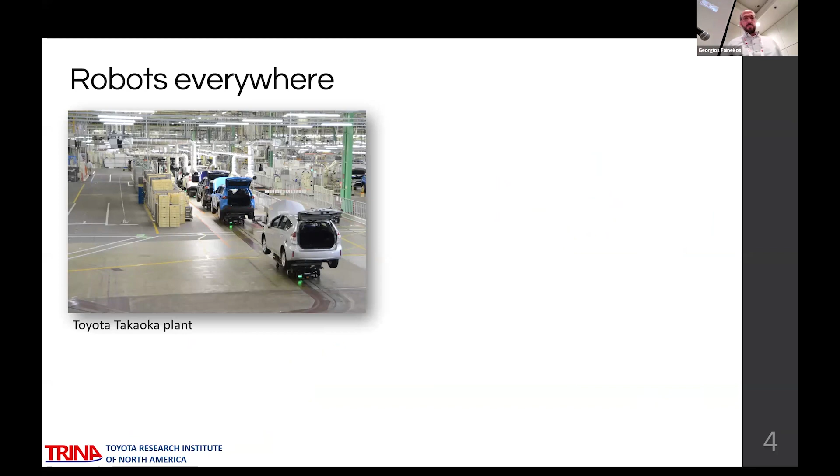Let's move on. Robots are everywhere, and this is a Toyota Takaoka plant. You have robots moving around the vehicles for assembling, robots in logistics warehouses and so on, and more recently, robots in hospitals. All these improve efficiency of the system, help in many cases with labor shortages, and so on.

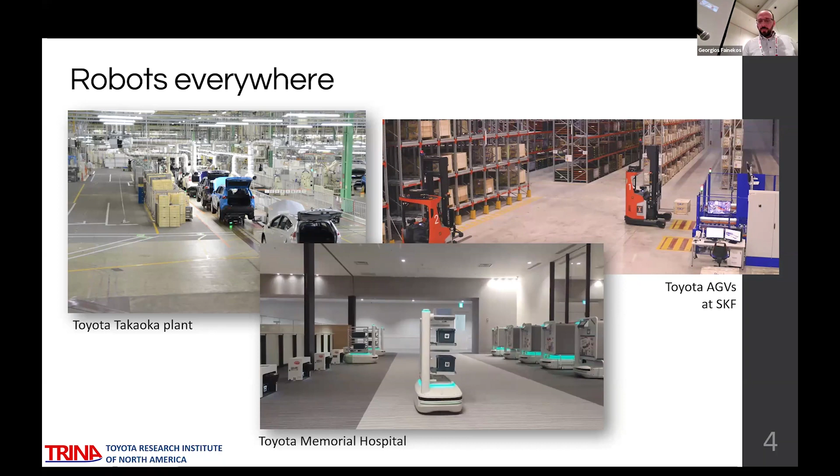I would like to highlight here a recent article by some of our colleagues in Japan, where they published an article exploring the development of a production-level system for hospital robots. It's a good read highlighting how they encountered several challenges in that environment and how they overcame them.

For example, when you have robots in an environment, they might block a corridor, since it's a confined environment—you don't have corridors for the robots separate from what the humans are using. Everybody's working together, so you will run into such scenarios. Another example is you may want event detection and scene understanding, to see what's happening in that environment. And finally, a lot of simulation-to-real and back testing and verification.

Again, this is not our team's work—this is primarily our colleagues here who actually develop these products. But we are inspired by these challenges, and we are doing our own research, trying to push the frontier.

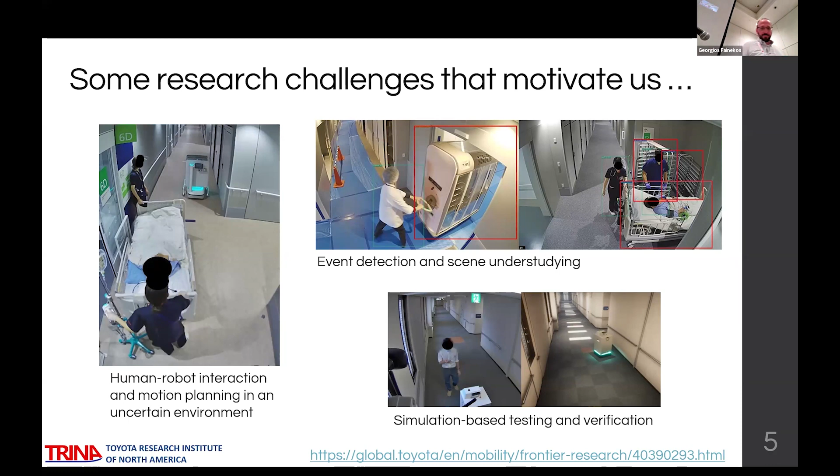Within that context, we work in all these layers of autonomy, from the global planner all the way down to the low-level control. That's what I'm going to briefly discuss today, taking you on a brief journey from global planners all the way to low-level control, where I'm going to advertise our latest toolbox that's publicly available for control barrier functions.

All right, so I'll start. Since we are just four people in that group, we are working a lot with collaborators. So at the conclusions, I'm going to circle back and say we are always open to collaborations—please reach out with ideas.

The first topic I'm going to present is actually the work of Kandai, who is here in the room. He did an internship with us, I believe two years ago, and we were looking back then at how to learn workflows so that we can observe existing processes and extract information, build models, and then optimize for cobots or any type of optimization we might like to do.

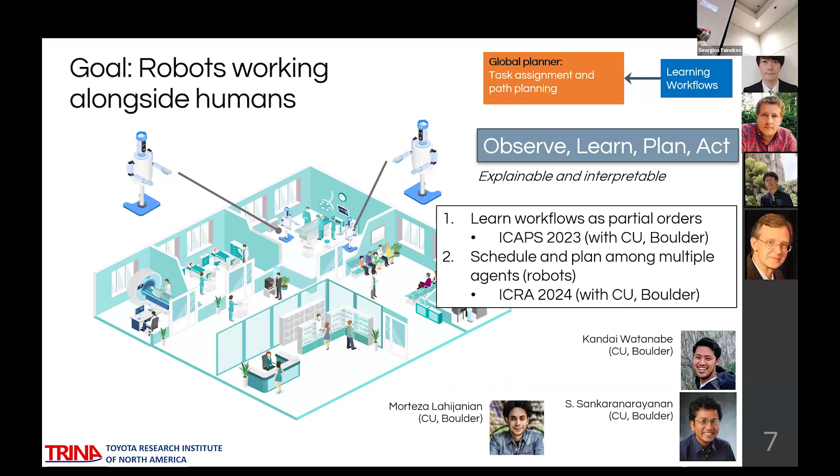There was also a follow-up work. When Kandai went back to his university, we continued working, and he's going to give a presentation on Thursday, so please follow up on that.

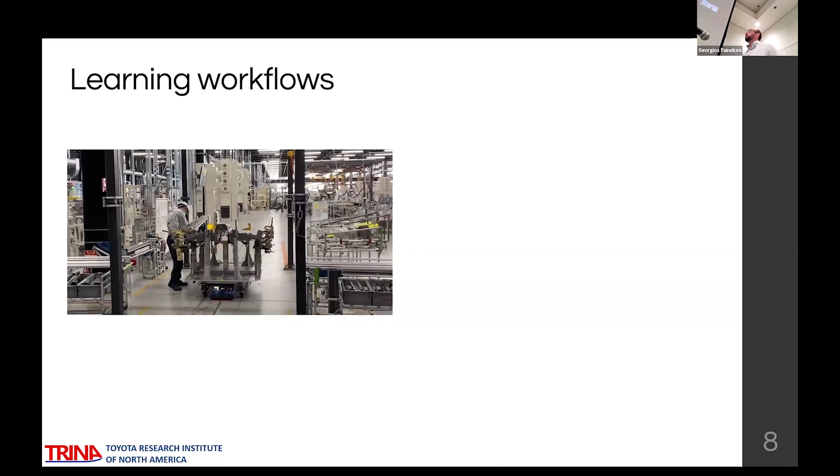Let me give you the basic idea here. Let's say you have a factory floor, workers are doing stuff, and you have a method to extract events occurring in that environment. This will typically look like time traces, meaning you have an observed event and a time that event happened, and you have multiple of these. What you'd like to do is collect all this data and learn a timed model that represents the constraints for that process.

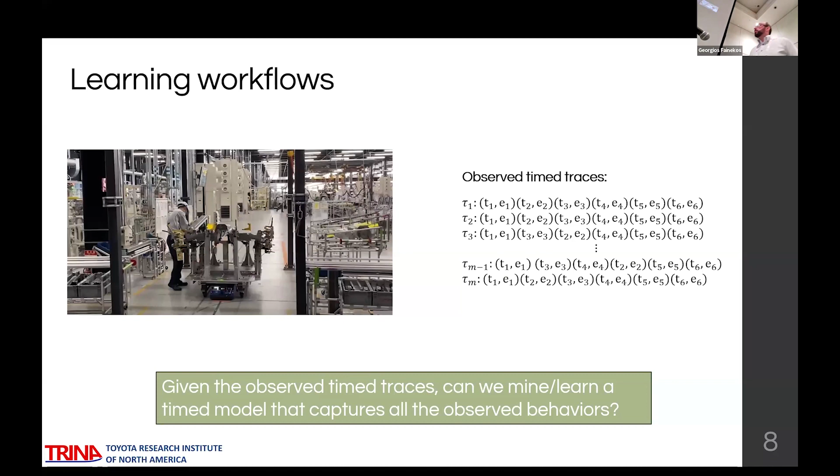So you have events coming in, and you would like to construct such a partial order abstraction of the events coming in. And in addition, you're going to add timing constraints because these events are happening within certain times that you observe. You collect all this information, and you are going to add clocks that measure time relative to certain events.

Your goal here is to collect all these constraints and then build a model that represents this with a minimal number of clocks. Minimal number of clocks is an important constraint here because this is what you need to track at real time to make sure that you're satisfying that partial order graph or not.

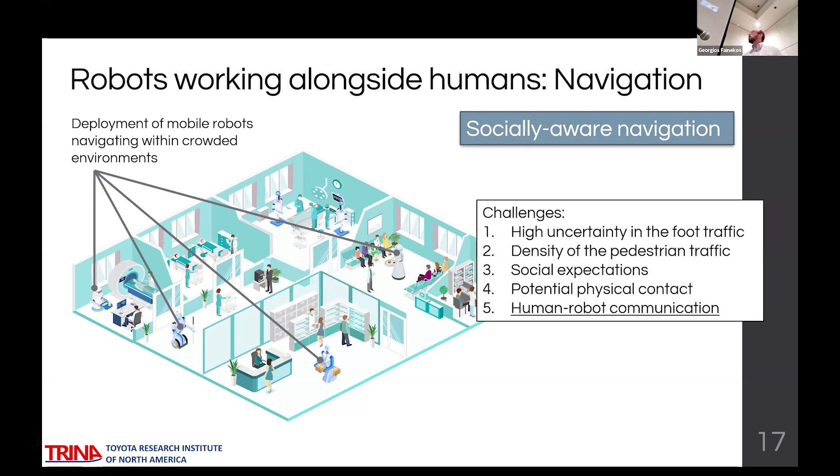I would like to summarize them here. We have high uncertainty in the foot traffic, how many people are in that environment, density of pedestrian traffic. Social expectations, potential physical contact between the robots and the humans, and finally human-robot communication, so that we can start

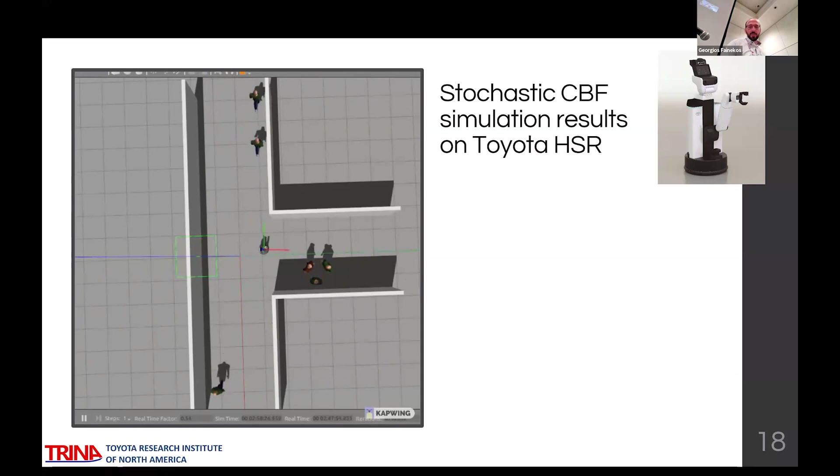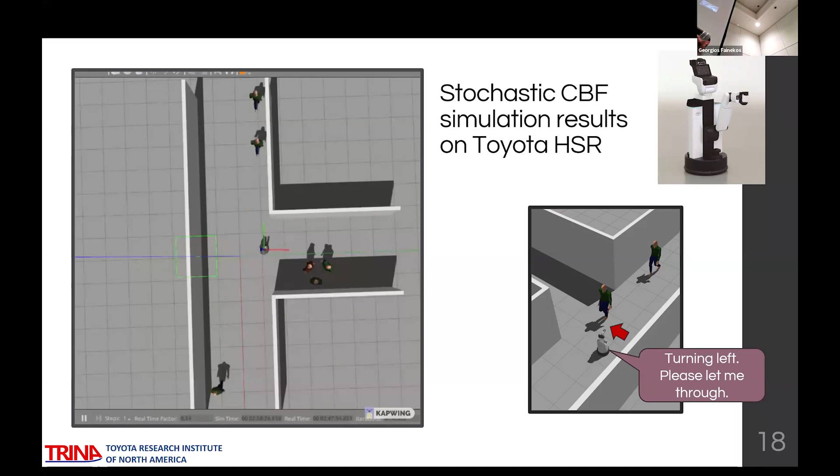So we would like ideally to be able to plan for the robot, to plan the communication actions in the environment. So at some point you would like to say, oh, I would like to make a left turn. It doesn't matter what communication modality you're using here. Are you projecting an arrow on the floor? Are you saying it verbally, are you having flashlights going on, or whatever? The question is, when do you plan to, and how do you decide what communication action you should be issuing?

This is work we have been doing with my former colleague and current collaborator, Sid Srivastava at Arizona State University, and we are continuing working along these lines.

So the idea is the following. We do the classical motion planning paradigm, and on top we have what we call a communication planner. The bottom layer is the standard RRT, for example, but it doesn't really matter, it's any standard motion planning technique. In this particular case, we use prior work we have done on rapidly exploring trees with control barrier functions as constraints to guarantee safety. But again, this is agnostic to that—it's just a method we had available to guarantee safety at a low level.

So we have the human motion model to predict the movement of the human from the perspective of the robot, to build this tree. But on top of that, we have the communication planning layer, where the important part is that we have a human sensor model—what the human may be able to perceive from where the robot is and what communication actions it has. Maybe it has some visual communication actions, maybe some verbal communication actions. It really depends. So what we have to do here is have a belief update on what we think the human may perceive.

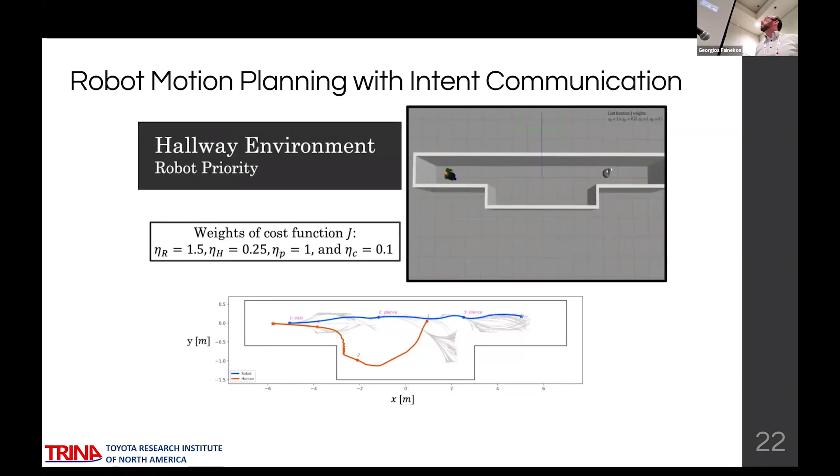The second part you saw there is that the robot did not have priority. Maybe the task it was executing was not time critical, so it stays on the side and lets the human pass by. So it's not surprising that if you communicate, you reduce deadlocks, and this is what you would expect at the very least.

And so you can also, by using a social force model for the human motion, collect numerical data. You can argue whether this is realistic or not, but nevertheless, when the human collaborates, the simulation experiment shows we can do much better in terms of proximity cost—how close you come to the robot—and deadlocks. In close, confined environments, if you don't have the communication layer, you can get into deadlocks. That also connects to the morning talk about communication between robots—if you don't have communication, you can run into deadlocks. The same situation applies with humans and robots.

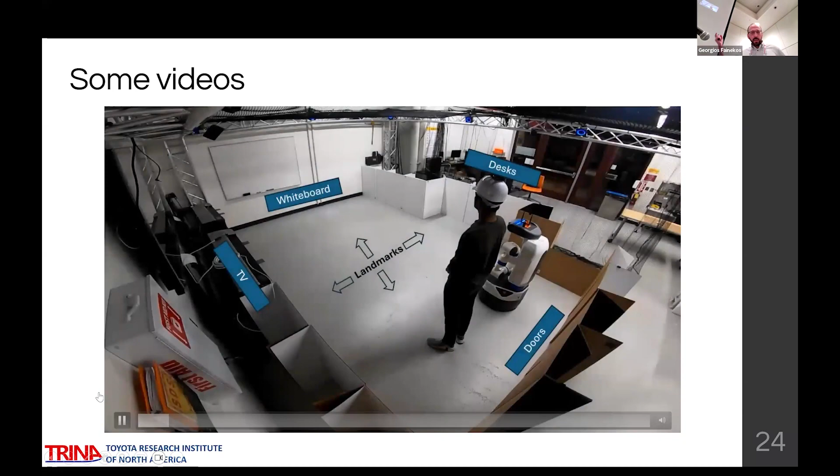We have real experiments trying to move this to more realistic scenarios. This is a scenario that Mehdi, who is the lead author on that work, has done—a small environment, but it works on a real robot. So this is the robot and human working next to each other. There's no interruption here.

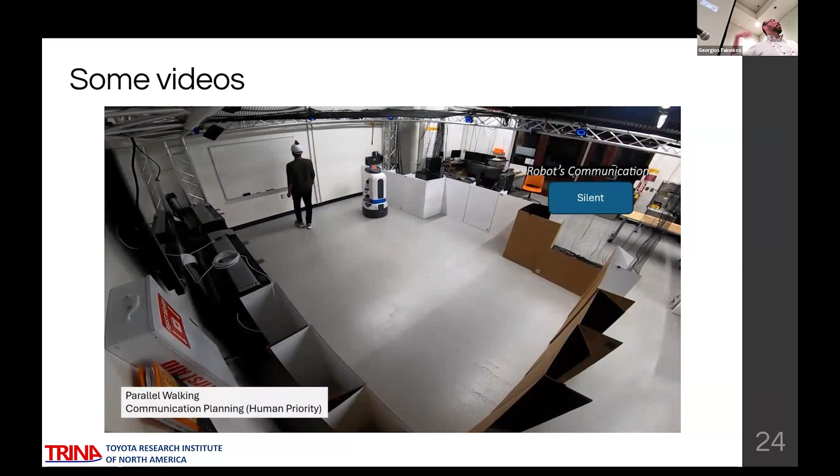I think it's a little bit clunky through Zoom, but you get the idea. You get the same behavior no matter whether the robot has priority or the human has priority.

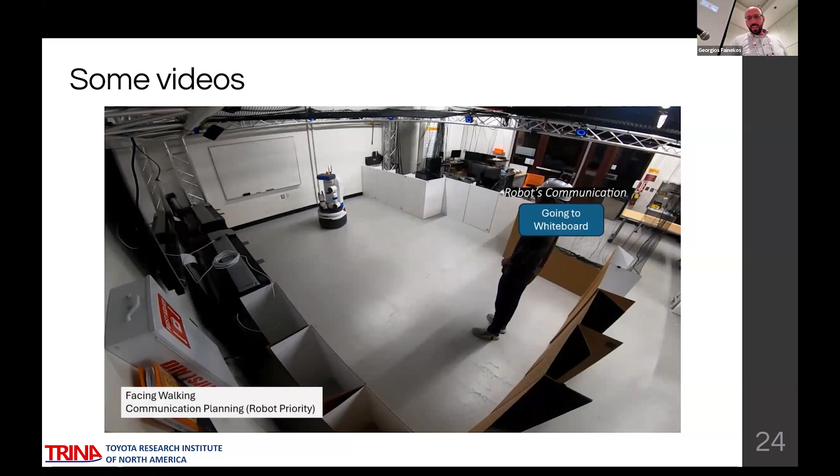Things become a little bit more interesting when you would like, for example, to go to the whiteboard. You tell the human, I'm going to the whiteboard. The human hopefully understands that and moves out of the way. So that's the experiments. I'll skip now the rest, just to give you an idea that there is progression into that.

I'll go now to the low-level control layer, where we do risk-aware motion planning. Again, in human-occupied environments, the uncertainty is higher. There is higher risk, and we need to somehow accommodate for that. There is a lot of work along this direction, maybe too much to try to summarize it.

From our perspective, what we have been doing, we have been developing control barrier functions that take into account probabilities and risk and so on. So let me give you just a brief presentation of the setup here.

We assume that the robot itself is a deterministic agent, has full control of its actions, but the environment is non-deterministic. In particular, all the dynamic obstacles operating in such an environment can be modeled through stochastic differential equations. And you may want to model neighborhoods of humans in case you have social constraints that you would like to take into account, and so on.

Our goal here is to compute control actions, paths, such that the probability of collision within a finite amount of time is bounded, and is bounded by something we choose, this probability upper bound here.

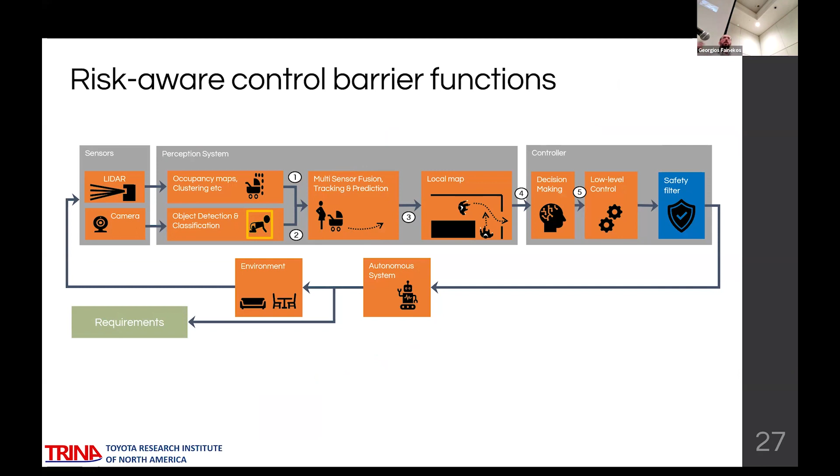optimize with respect to a reference trajectory produced by the pre-existing control system, so that you satisfy your safety constraints and bound the risk to the desired level.

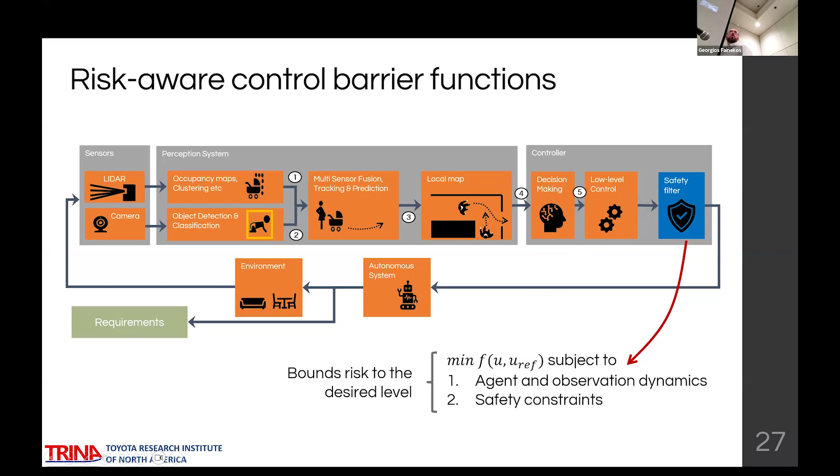Typically, this is how it looks like. You have a quadratic program, you have a bunch of constraints so that you can bound the risk. And depending on the exact method that you're using, you're going to get different mathematical formulation here. And every paper we write has a different controller here, so I'm not going to go into the details.

The reason I'm showing that is that what we are trying to do now, and that's the toolbox that we released, is to make this easy. So we would like to be able to have people code something with a control barrier function, risk or non-risk aware, within minutes, hopefully. So that's the next step I would like to present here.

It is our new toolbox, which we just released on control barrier functions. We utilized functional programming primitives, so everything is encoded within the functions that you are using.

We assume that you're going to give a controller, the system dynamics, any state estimator that you might be using, integrator for the simulation, perturbations if the system problem is stochastic, and any sensor model that you're using.

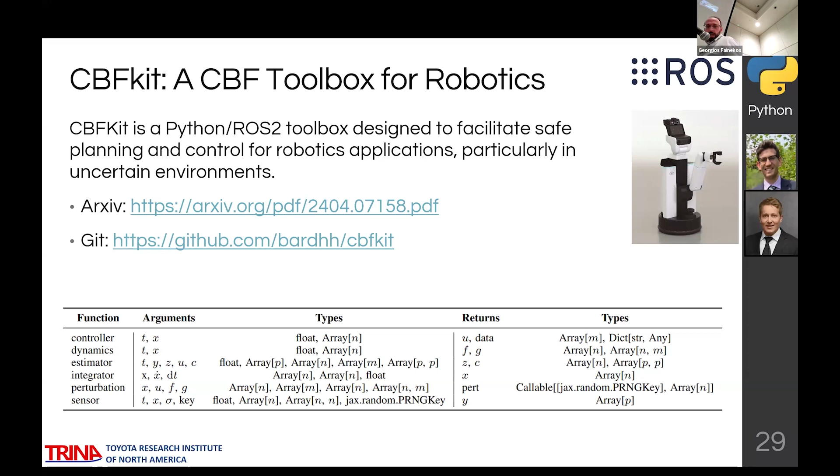This toolbox was primarily developed by Bardh and Mitchell, and we asked another intern to use that toolbox without having seen it at all as a proof of concept that this should be easy to use.

What we asked him to do is to just implement a very simple collision avoidance controller for two single integrators. So you can think of these as two individual robots. He did that within 1 hour.

So he downloaded the toolbox, read the manual, read the tutorials, and implemented this system within 1 hour, starting from scratch. On the other hand, you have to keep in mind, of course, that he's a control barrier function expert. So even though he has not seen the tool before, he definitely knows what he's doing, right?

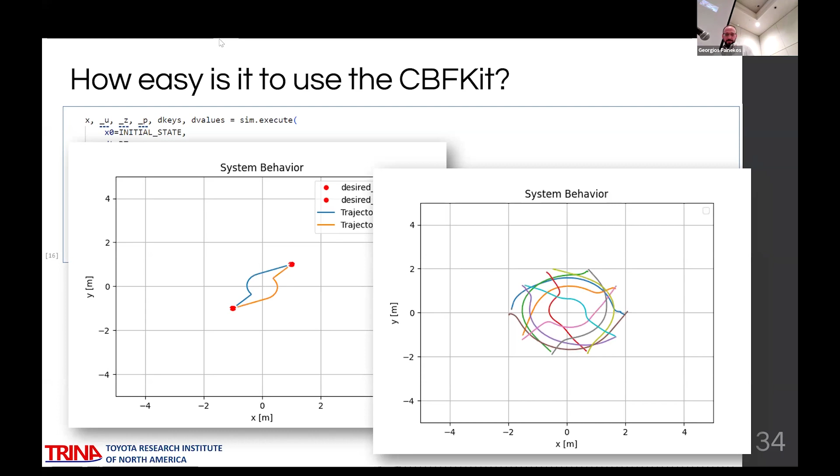Another question: the physical velocity you showed, in social robots you basically also have a trajectory prediction for humans. And do you have a prediction error bound for that, a guarantee? For example, when you have Kalman filters for doing that prediction, or probability distributions, you can add constraints to take that into account. Yeah, we have papers on that. Thanks.

Thank you so much for the presentation. Maybe following up on that, one short question: does the tool also automatically treat the problem of discretization? For instance, if you have too large a discretization, you might actually be unsafe in between the updates. Right, so no, we didn't do that. All right, thank you.

Good feedback, good feedback. We'll be incorporating all that in the future. Thanks.